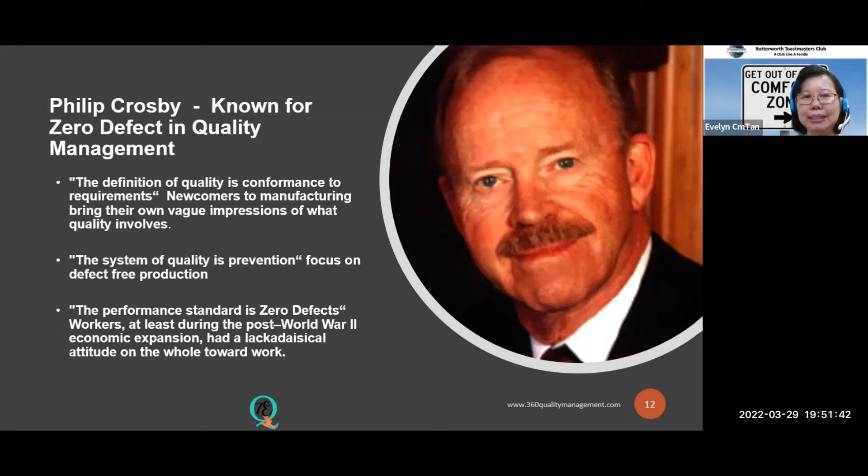Yes, that's right, there are more factors than this. So that means that even though we have Industrial 4.0 in the future, that will not really solve the problem of zero defect as well. I'm glad to see the answer as no, because that's not the only thing that contributes to zero defects.

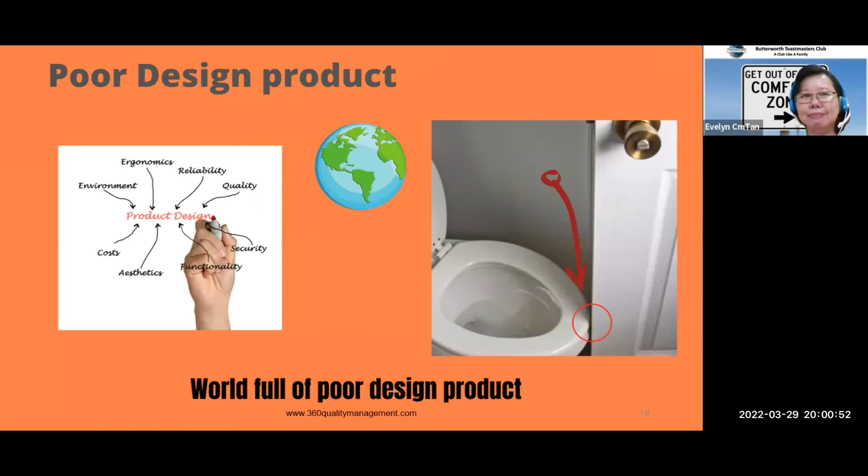Because in the past, even till today, we still have this traditional silo or over-the-wall approach when we design products. When a company designs a product, they start with the concept and development phase, where the main team of design, engineering, and marketing focuses only on product features and time to market. They are like a secret society—they do not want too many people involved, because more people involved means more work on designing quality, which could be an obstacle to the main metrics of product features or what customers want, since customers want as many things as possible. At the same time, time to market, the main metric, would be impacted, and this is what they do not want.

In design validation, we still have more of design engineering and maybe the process procurement team coming in. Finally, we have the prototype, where maybe the design is happening somewhere else in the world. After that, they have a pilot build, maybe in another part of the world or with contract manufacturers. They just throw it over the wall—meaning I design it, you build it, with the hope that the manufacturing process can compensate for whatever design flaws they have. Finally, during the launch phase, only then do you realize that quality does not come in until very late. For more successful companies, I think they will have quality already involved during the concept and development phase. If you are in this type of company, I would really like to congratulate you for that.

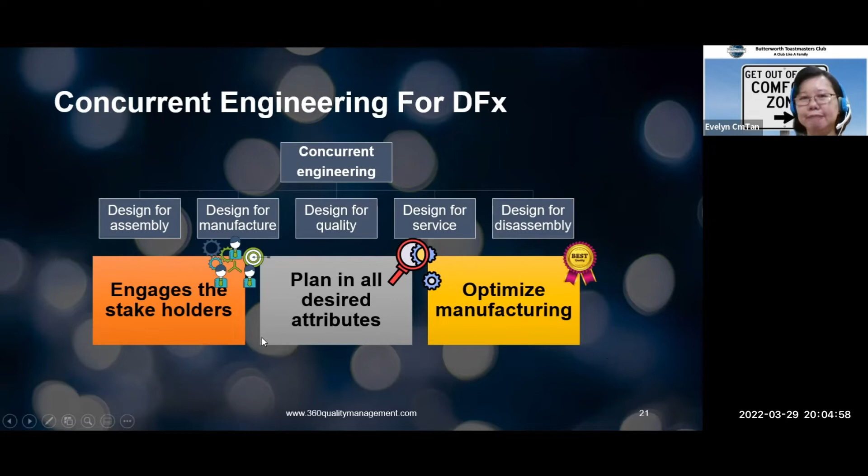Next, for design for manufacturability, we shall look at it from a more detailed perspective where we should cover all aspects of the product. As we've said, design concurrently, and this product design should be evaluated for everything - not only product features and cycle time, but also optimum product cost and the highest possible quality, because the end consumer only buys one product, and we must make sure that product has zero defects.

There should be a considerable amount of planning into the manufacturing process as well, to achieve the best quality product after quality has been designed in.

We also need to create product designs that are insensitive to process inputs, because in manufacturing we have process inputs, the transformation process, and process output. In these process inputs there will be variations, and the design must have features robust enough to compensate for long-term process variations, those fluctuations, or common cause variations as we call them. At the same time, manufacturing and test engineers should also influence the product designs to make them manufacturable and testable.

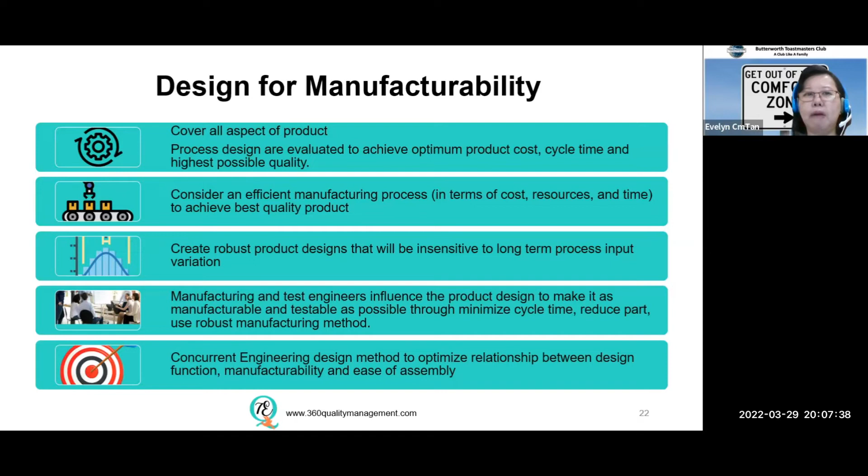So design for manufacturability principles include designing parts as simple as possible, to reduce complexity in the supply chain and in the manufacturing process. The simpler the product is, the better, right? Do you agree to that?

Also, as I said, it should be simple to transform, simple to manufacture. Another factor we need to look into is the availability of raw material. How many times, if you've worked on a manufacturing line for a long time, have you had product quality issues due to supply problems? This is also very important, that we need to look into the raw material itself, and I'll stress this in the following slides.

These are the main principles. Definitely there will be other related factors, but we shall go through these three for today.

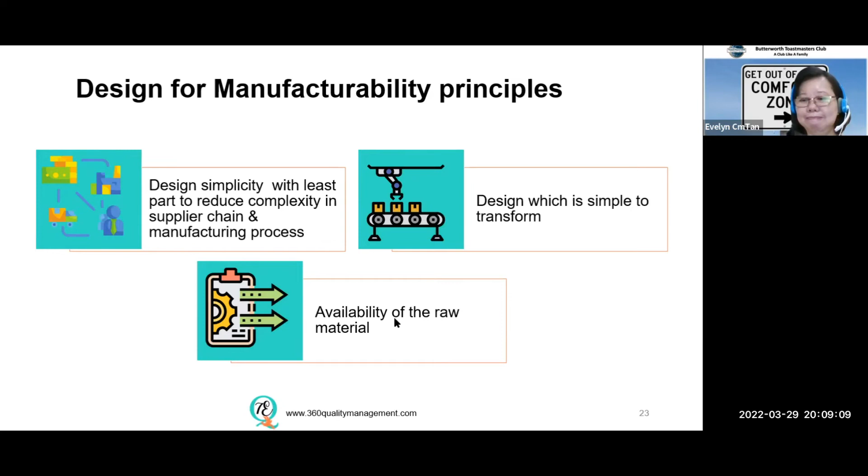Next, we will look at the manufacturing process. Let's understand a little bit about the manufacturing process itself.

In the manufacturing process, we will always have the process input, which is our 5 M's and 1 E - or the 6 M's if you want to call it mother nature - and also the process itself to transform into the outputs we want. In the process inputs we have man, the operator; machine; methods; materials; and measure, which is related to the finished goods. That measurement process also has variation, as you all know, which is why we perform GR&R, and also the environment, if your product is sensitive to certain environments.

All these process inputs will have their own variations, and all these variation inputs, through a transformation process, will contribute to the output variations as well. In other words, if you have good inputs, you will have good outputs - garbage in, garbage out. In the manufacturing process, we want to control all these inputs to have as little variation as possible, and then we monitor the outputs, because we cannot control the outputs anymore - we can only control the inputs. Agree?

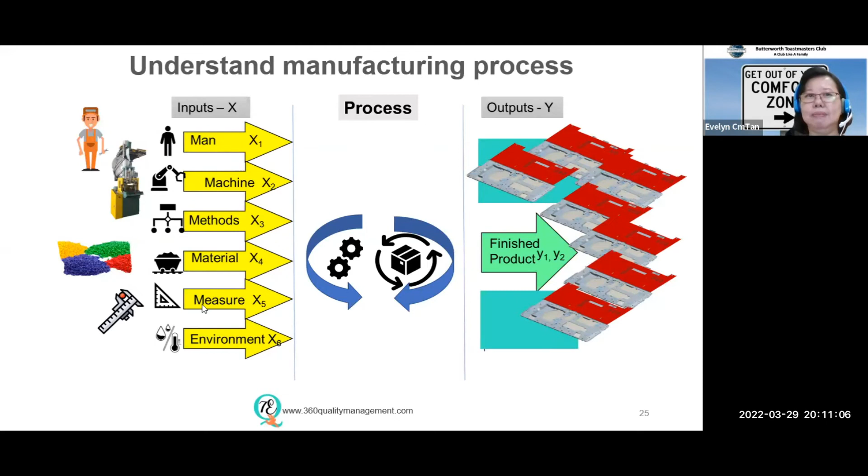For man, we will have training, certification programs, and also workforce stability, which is very important because we do not want to change too much. The more stable the workforce is, the less variation you get from the contribution of the man itself.

The machine is about qualification and preventive maintenance, so that we control the drift and shift of the manufacturing equipment itself. The methods include the process management plan and work instructions, making sure they are consistent and standardized, as well as the measuring process, which includes tests and inspection of the products.

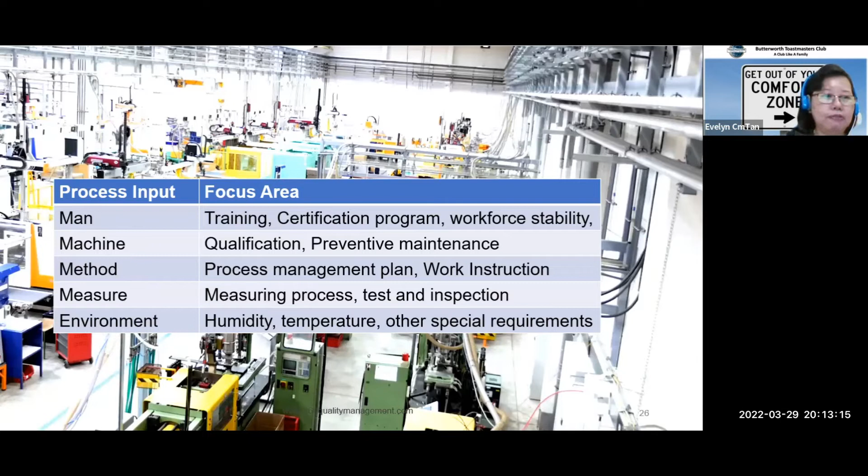Any questions so far? Okay, if not, I will go into the next one, which is material. We will look at material itself.

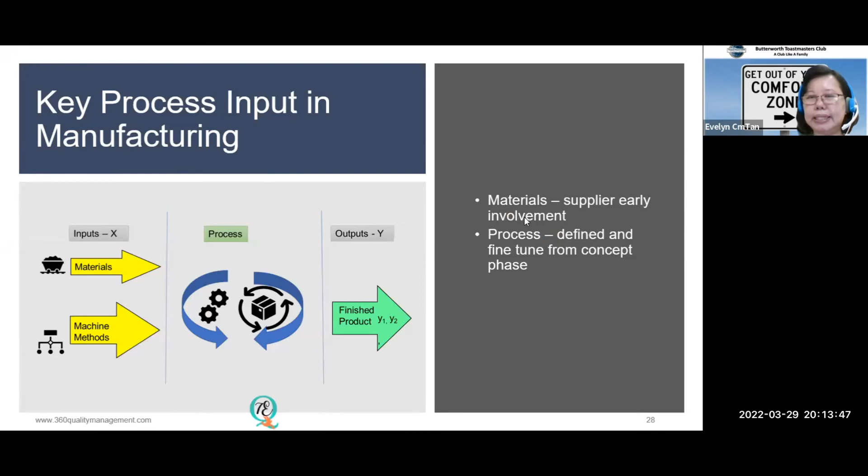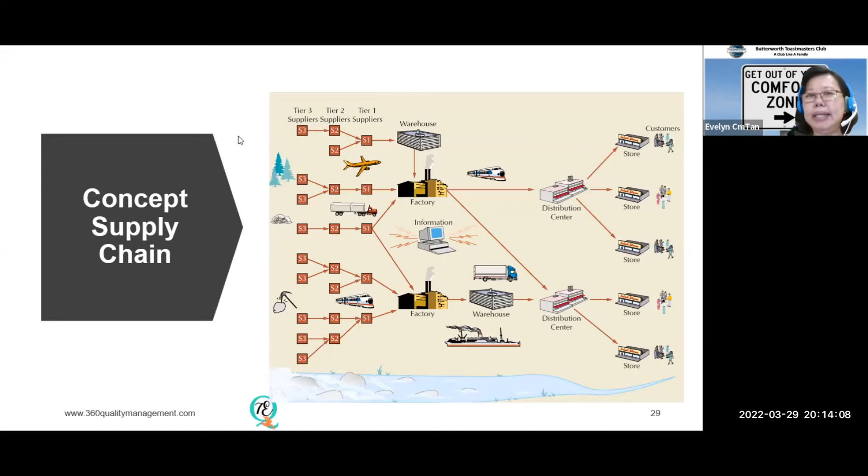We have already learned the key process inputs in manufacturing, and now we are concentrating on materials. For materials, we would like suppliers' early involvement and procurement's early involvement as well, because for materials we must understand the concept of supply chain. One material that comes into your manufacturing plant actually comes from a long supplier process.

For example, in a smartphone, we could have up to 6 or 7 tiers before the final smartphone can be assembled. All these tiers go from mining to manufacturing into sheet metals, then into some kind of product like a wafer, forming it into a semi-finished product, through sub-assembly and final assembly. All these things go through a manufacturing process. That means in this world, there is no single entity that can manufacture a product end-to-end, from mining, from nature itself, through to finished goods.

Therefore, all these supply chains will also contribute to the variations, and this also contributes to the parts quality.

If there is any weak link in a supply chain—do you know of the Kobe Steel incident many years ago, about 4 or 5 years ago? There was a weak link, meaning the sheet metal or upper tier suppliers, but in fact their actions potentially impacted manufacturers in the automobile and maybe aerospace industries, where they use metal as a main product for mechanical structures. So any poor quality material, or weak link along this tier, will actually impact the consumer or the end product downstream—that means from upstream to downstream.